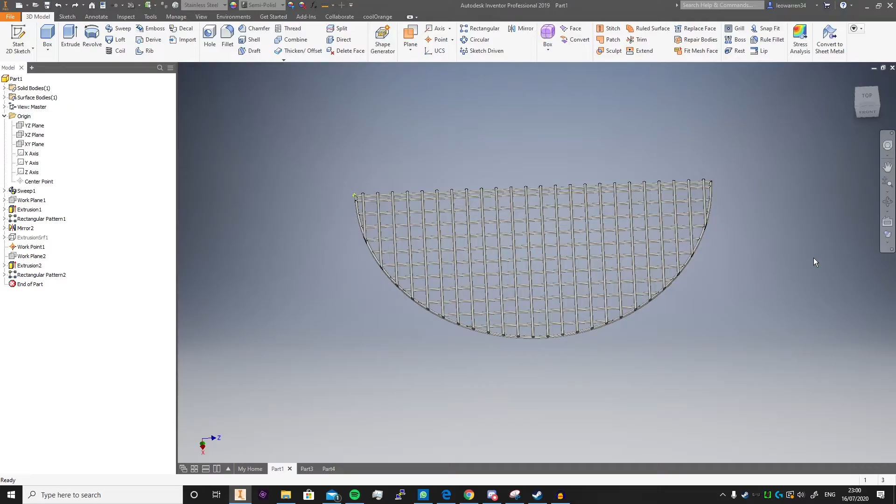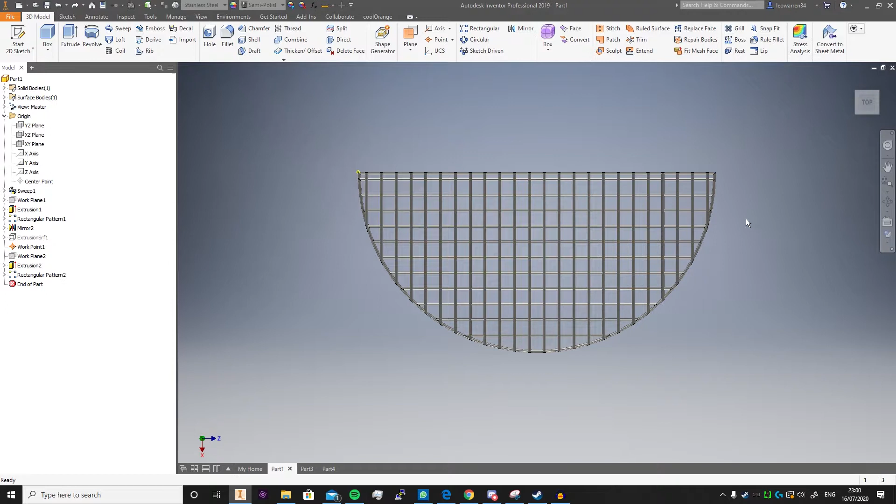In this video we're going to be making a grille - that's a grille with an E, and it's just a covering. We're going to model the exact same one we have here. The main feature is that it starts and ends exactly like it just fits perfectly. If you look here, the end bars are perfectly trimmed around, and it's all done using relatively simple features, optimized rather than modeling each bar - it does it all in maybe 6 features and a few work points.

This is one attempt I had earlier, so we just click part and we can now start working on it. We click start sketch and we're going to start the actual frame bit, and let's say we go out - we're going to snap to there and go 250.

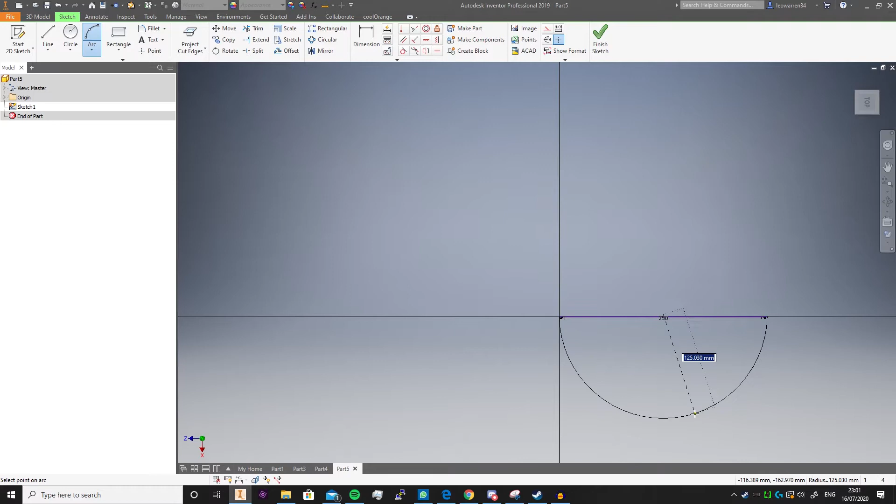Click OK, and we're going to make an arc from each end at 125 to make a perfect semicircle.

Finish the sketch and we're going to start another sketch right here, and we're going to click circle and we're going to do 2 mil. From the 2 mil, click OK.

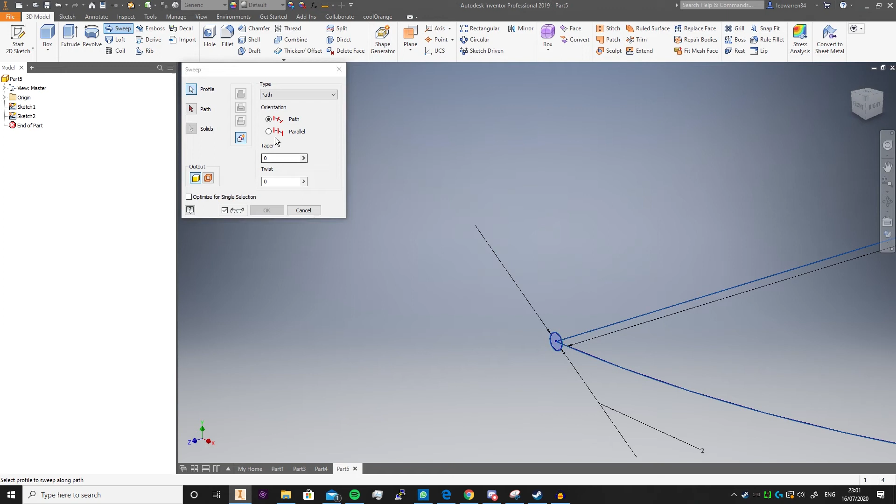We're going to finish the sketch, sweep along that profile, and then select the frame as the path, click OK.

Now then we're going to grab some work points. These just help make the whole middle thing a bit easier, and we can snap one there, and we'll snap the other one there, and we'll do the plane as well at the same time. We'll select that work point there, job done, and we move on to the other side.

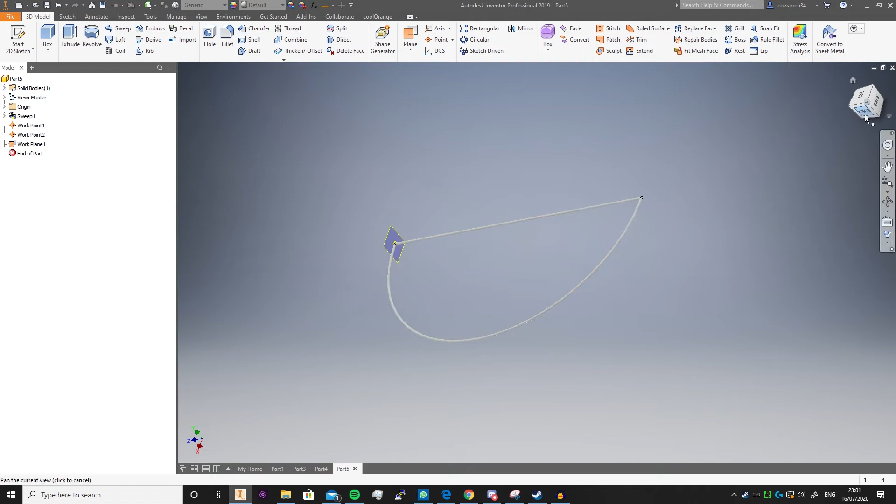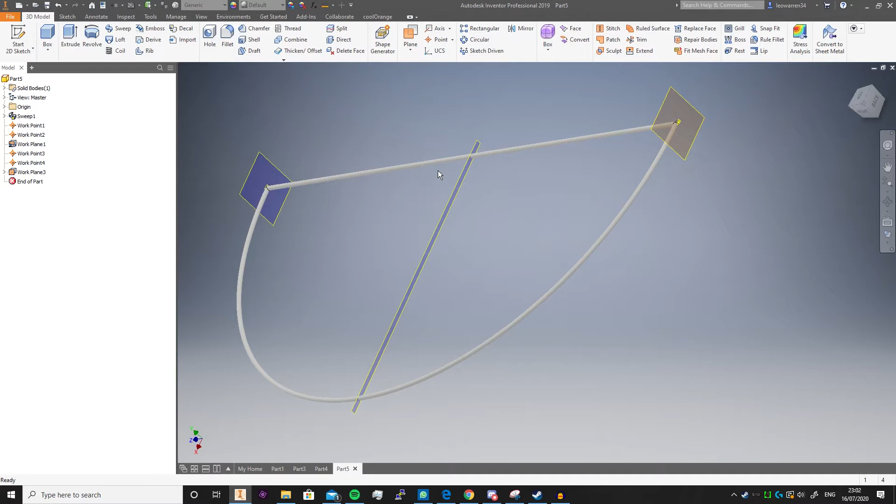So what we can now do is just go onto here and really look between. If we want to, we can project the cut edges, and if we just set the cut edges to a construction line, that gives you a bit of area. If you wanted to take the center point, you could just hook onto that midline.

Let's make this 1.5. If we use the dimension tool, we could dimension between each section - let's make it 5 mil.

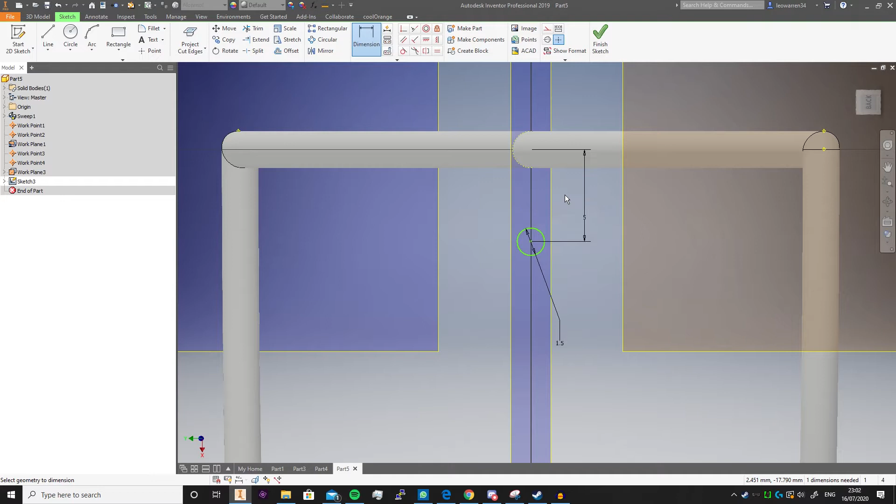Finish the sketch. Now what we can do is just make these work planes disappear for a bit, using the visibility option in the context menu.

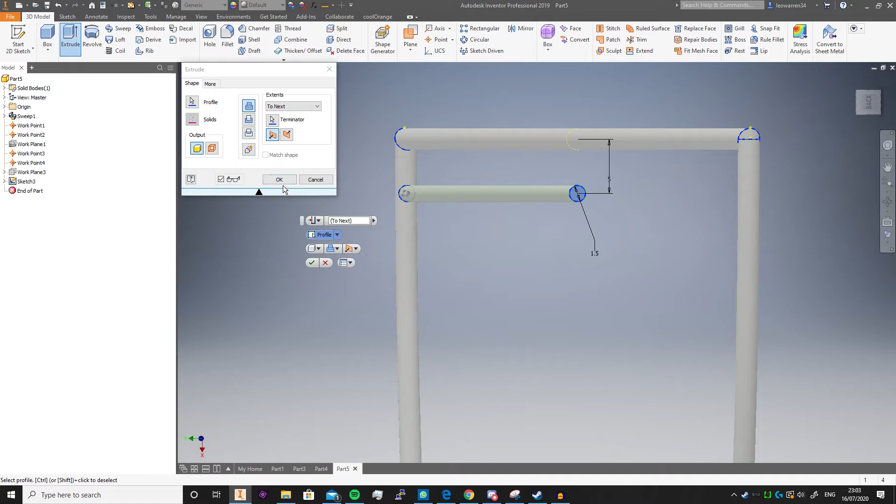Now what we can do is use Extrude to next. What it does is run the extrude until it hits the next thing, being the frame, which is why the frame's there. Click OK. Job done.

Pretty simple stuff. Now we go to the rectangular pattern. This is where it gets really cool, because what we can do is, since it's using 'to next', we can update it - every time it computes a beam, it will completely adjust it.

We'll select the x-axis, and go based on distance. This takes a max distance as a value, and we're going to say we want 11 units, and it goes like that. Now if you click this arrow and click adjust, it should change them perfectly.

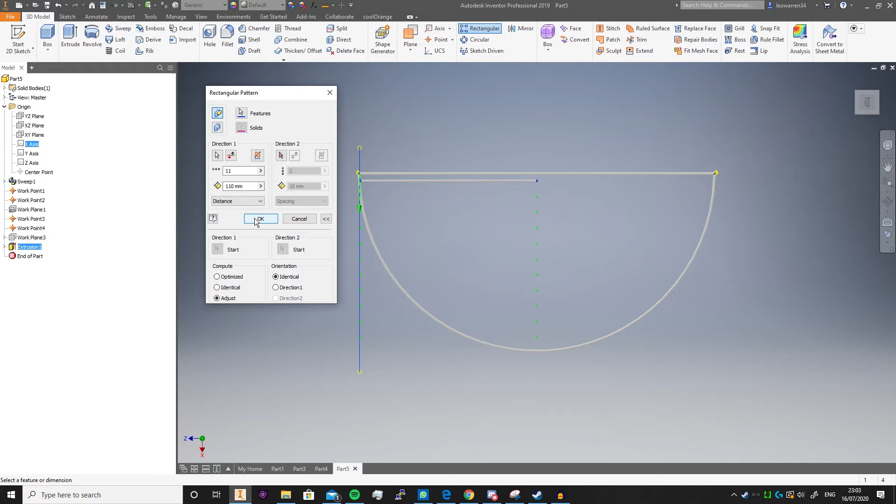Now you've got one side of the grille, and that's really easy to do, because now if we just go to mirror, we can take this whole set here, click the mirror plane, and just click OK - and there, job done. It's done all of it.

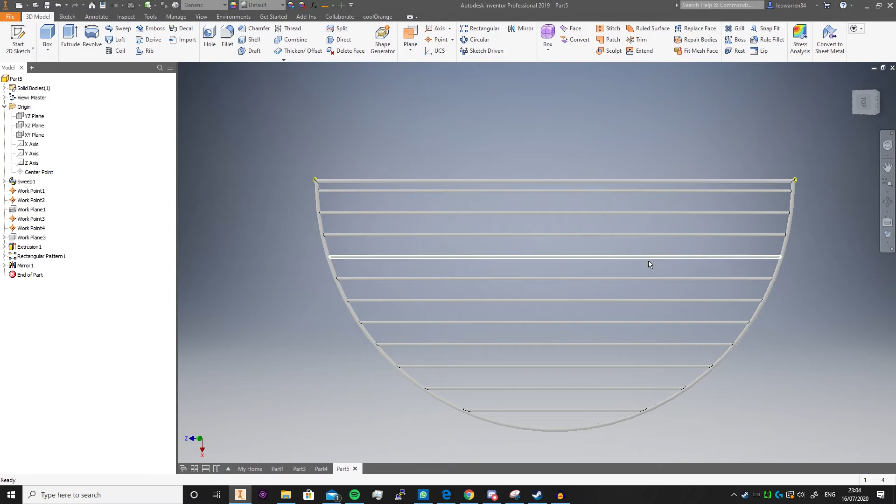So now the next job is actually quite simple, but it's a little bit more complicated because it's got a little bit more fancy. But if we make this plane visible, now this is the kind of mid plane where everything starts. Now if you notice, it perfectly splits this in half, which is important because that means you hit the widest part of the frame, because a circle will get wider, and then it will go smaller.

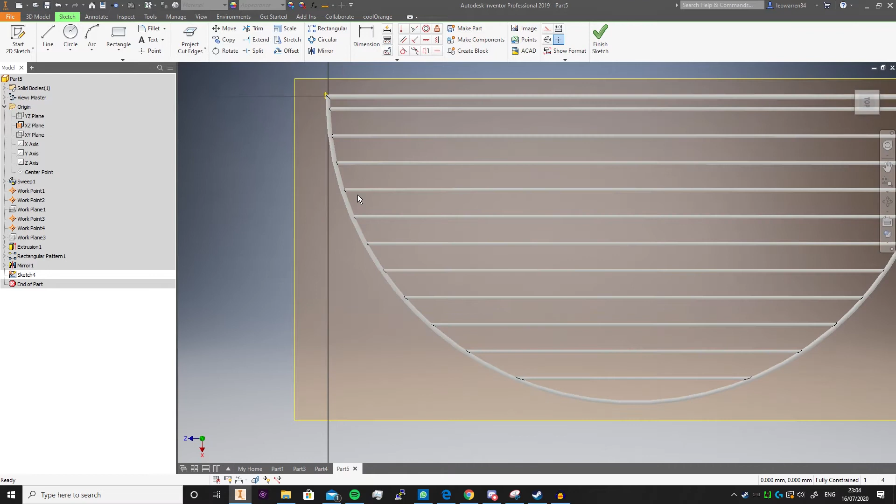So now what we can do is if we start a sketch on here, we can do a couple of things. We can really project the geometry, so we're going to project this outermost edge. Job done. And if you really want to be picky about it, we can project these 2 little ones here. And we can finish that sketch, and we can really just make this whole thing disappear.

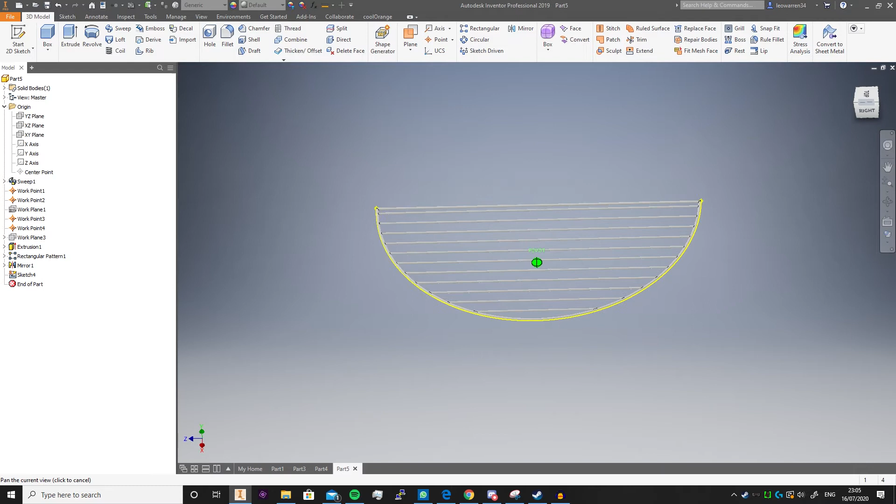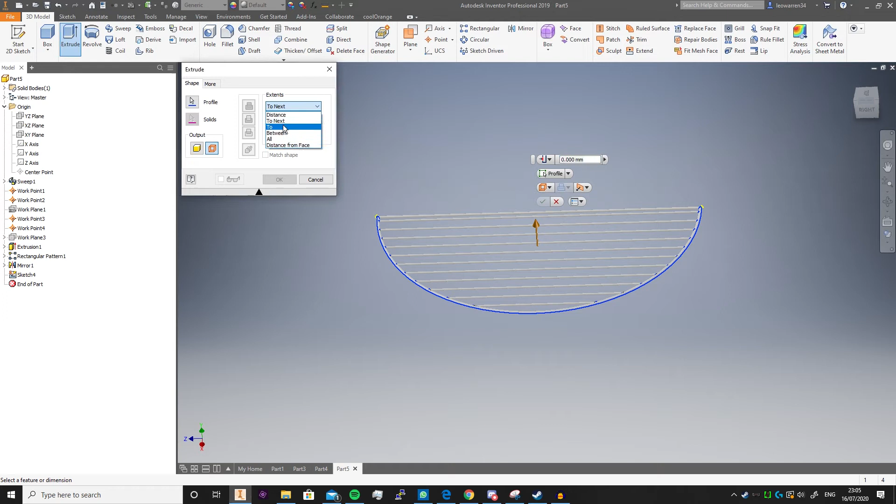Now, why do we do that? Well, this is so we can make the actual constraints for the vertical ones, because the issue is there's nothing for it to get caught because they have to go. We're going to make it go on top, so we're just going to change this to a surface. We're going to click the extrude, and we're going to change this to distance, and say, let's say 25. Click OK. And now you see we've got a little bit of shroud. It makes life a little bit easier.

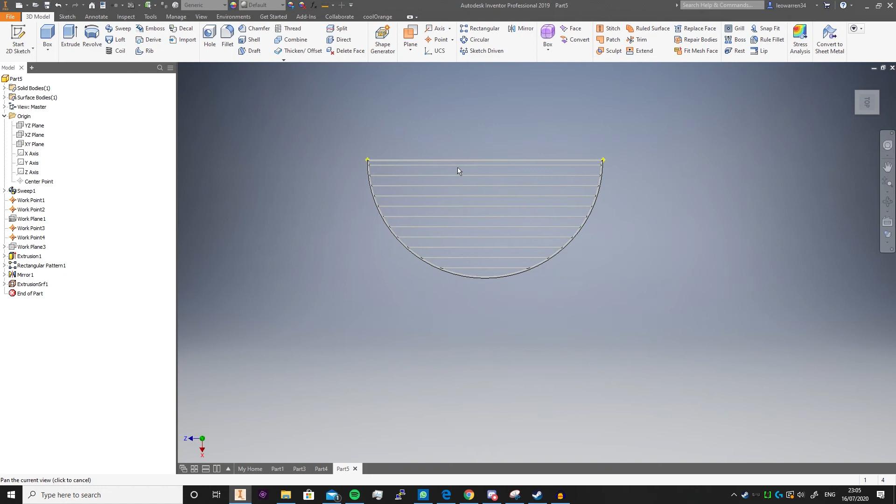Right. And so the next job we then need to really do is we can start to draw the actual vertical parts. Let's see, have we got any planes existing there? Why, yes we have, that's perfect. So now what we can actually do is we can now make the YZ plane, and we can start drawing on this plane.

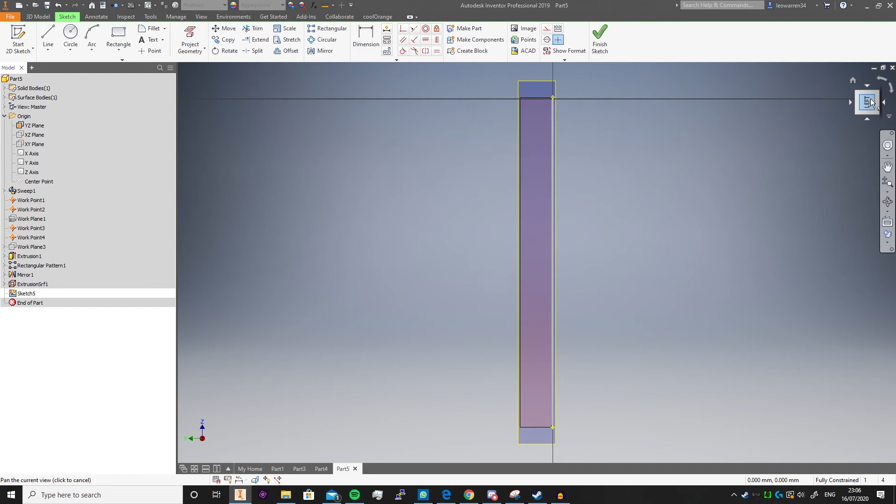And so if we just spin this around, what we've now got is this part here. And what we can now do is make a drawing, so on here we've got the sketch, and let's project this top line here. So that's really giving us a work line to start with.

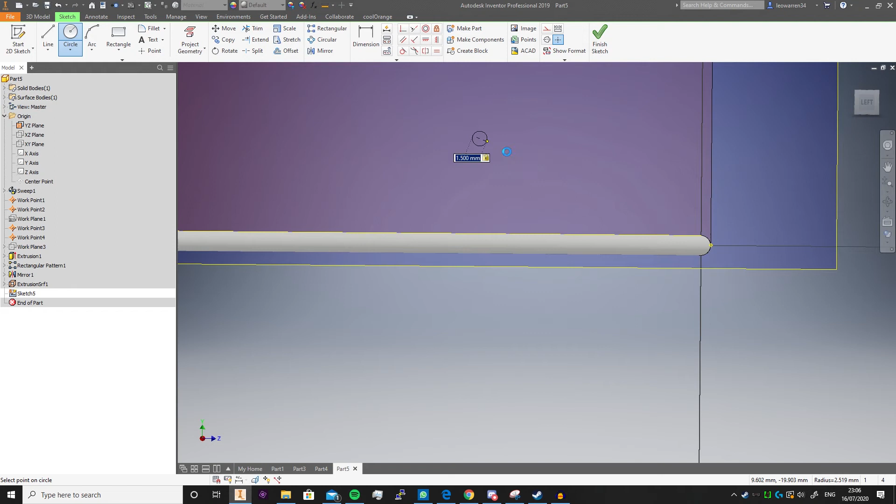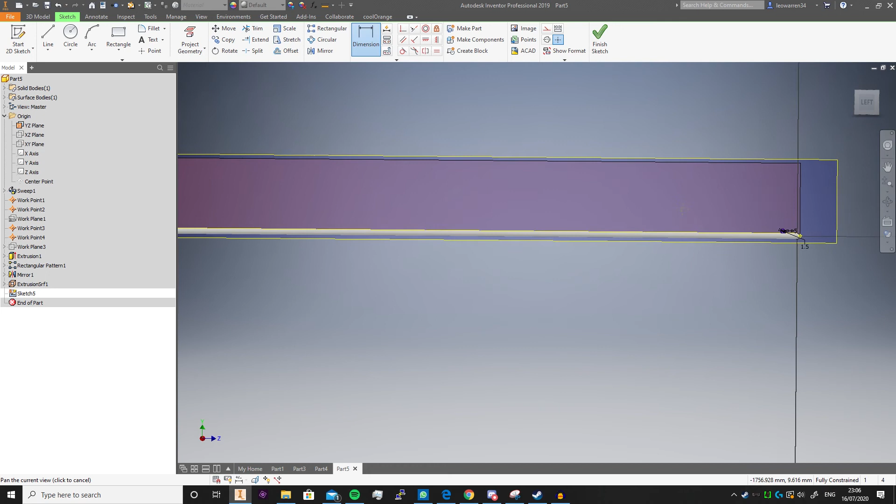And let's just plop a circle, and let's just say the same 1.5 we're working with before. And then we're going to make it tangent to that line, click OK. And then what we can also do is if we go to dimension, we can select the midpoint, select the end of the line, and let's say we're going to make it 5 like we did last time. Okay, and this is where we finish the sketch.

And this is where we can actually turn off the YZ plane. And now we just extrude, and we use the To extent this time, and you see it then just goes straight to the plane. Click OK.

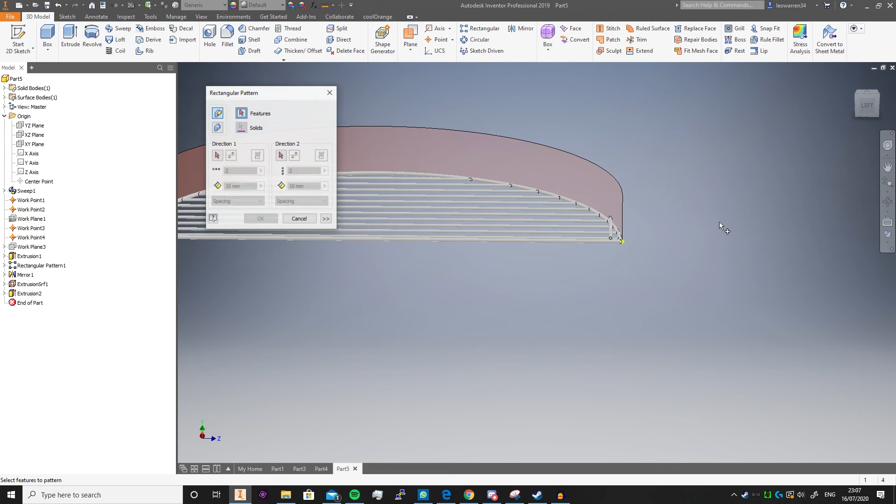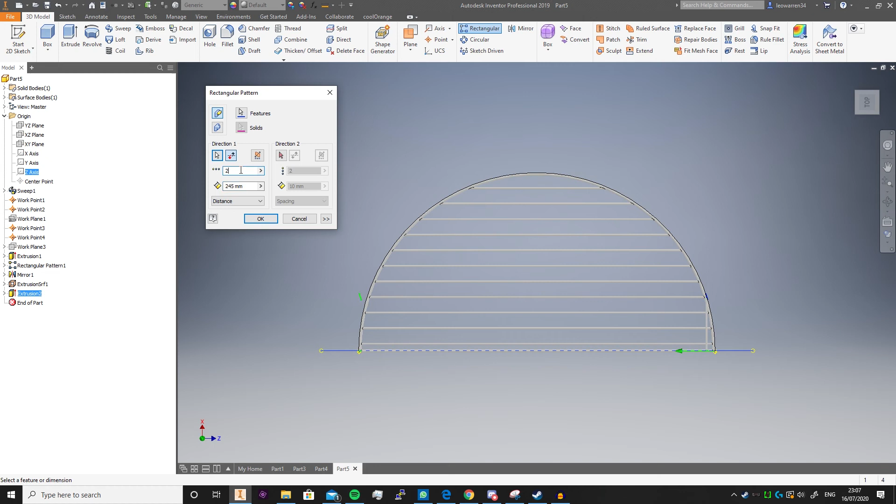And now if we then use the rectangular pattern, we can select that, the extrude we made, and the direction we'll just say is - where are we? Let's take a top view part, and we're going to go on the Z. And we're just going to flip it, and we're going to say the distance, let's say 245... and let's say we go with 24. Actually I want to go 240. That looks about right, and then we're going to remember to set it to adjust, and we're going to click OK. And what you can now see is that all these grilles are now perfectly joined up.

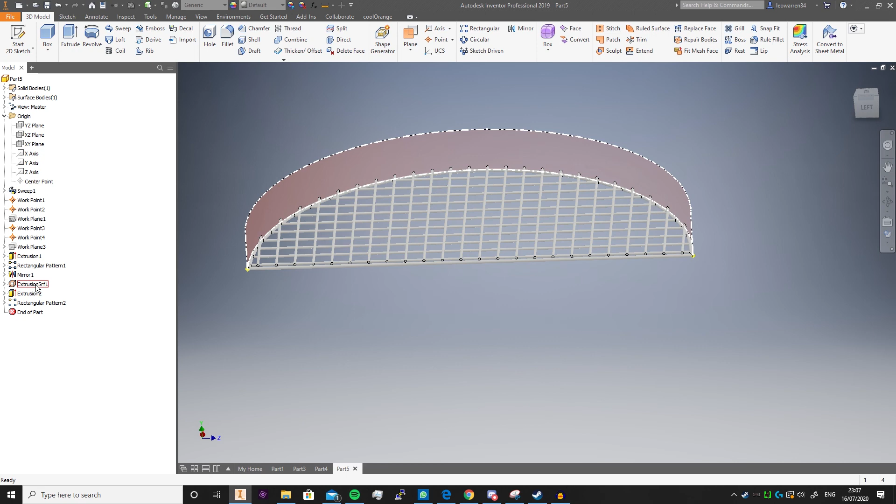And what we can now do is hide the extrusion surface, and there you go, a grille. And the only thing really left to do is change this to like a stainless steel, and that is it. You can now just see a perfect stainless steel grille. There's nothing much more to add to it.

So yeah, it's kind of just a basic introduction to using Extrude, and why we use the To extent and using adjust, especially in rectangular pattern, allows you to do this so much faster. So yeah, thank you for listening, and I'll see you in the next video.